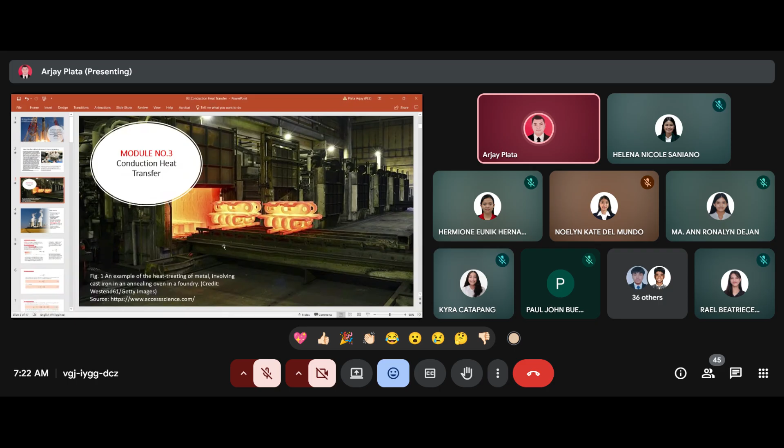So, our objectives for today are first, identify the important properties in heat transfer, develop a deeper understanding of Fourier's law, develop from basic principles the general equation termed the heat diffusion equation, which governs the temperature distribution in a medium, and solve problems related to conduction heat transfer. Okay. We will discuss the heat diffusion equation or heat equation, which governs the temperature distribution in a medium.

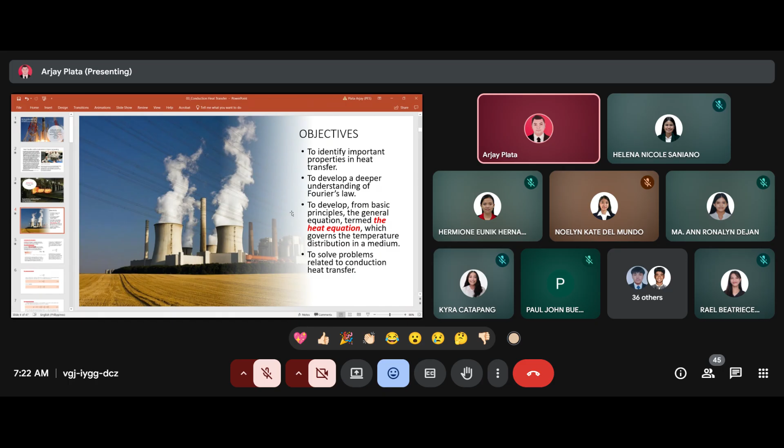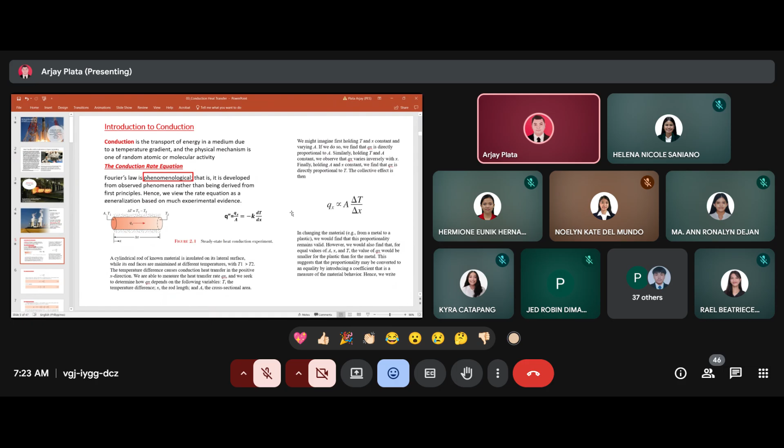Yes. So as we discussed, conduction is the transport of energy in a medium due to a temperature gradient, and the physical mechanism is one of random atomic or molecular activity. So if there's direct contact and there is a difference in temperature between the two surfaces, the heat will transfer. Fourier's law is phenomenological.

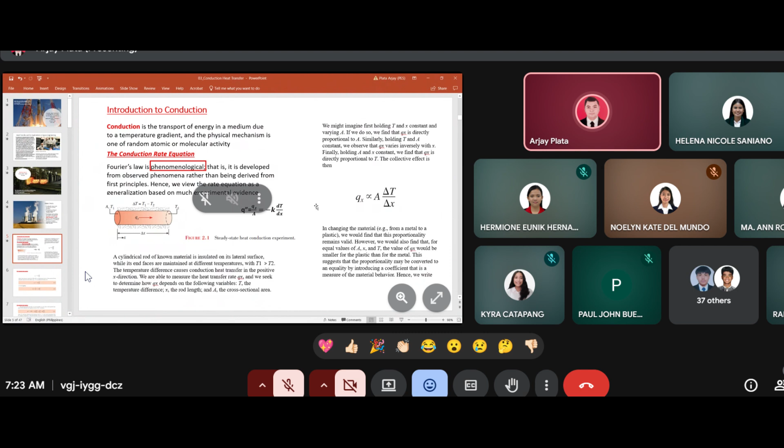When we say phenomenological, it is developed from observed phenomena rather than being derived from first principles. Hence, we view the rate equation as a generalization based on much experimental evidence. So during our first meeting, I mentioned that Fourier's law is experimental.

So Fourier investigated a cylindrical rod of known material, insulated on its lateral surface, while its ends are maintained at different temperatures: T1 on the left side and T2 on the right side. T1 is greater than T2, so obviously the heat will transfer. The temperature difference causes conduction heat transfer in the positive x direction. This is our x direction, the delta x.

So we are able to measure the heat transfer rate, Q, and we seek to determine how Q depends on the following variables: the temperature difference or delta T, the rod length, and the cross-sectional area. So Fourier checked how the change in temperature, the area, and the rod length vary.

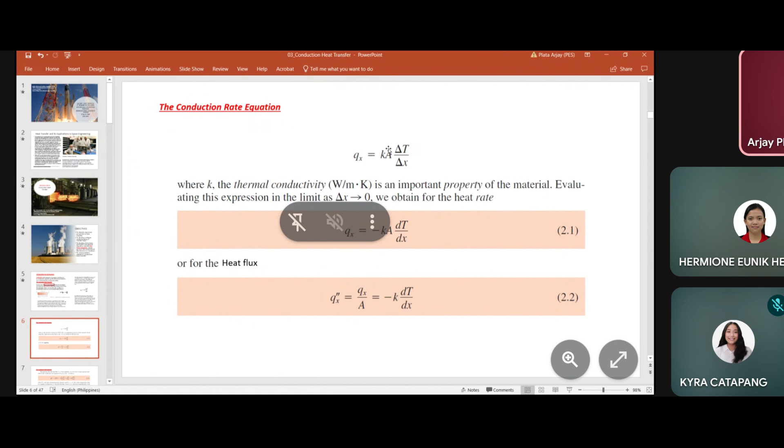However, we would also find out that for equal values of Ax and T, the value of Qx will be smaller for the plastic than for the metal. So this suggests that proportionality may be converted to equality by introducing a coefficient that is a measure of material behavior. So we write the thermal conductivity K, which is a property of the material.

Evaluating the expression as delta x, in the limit as delta x approaches 0, we obtain the heat rate equation Qx equals negative KA dt over dx. For heat flux, we just divide the heat rate by the area, giving Q equals negative K dt over dx. So that's the heat rate equation, Fourier's law equation.

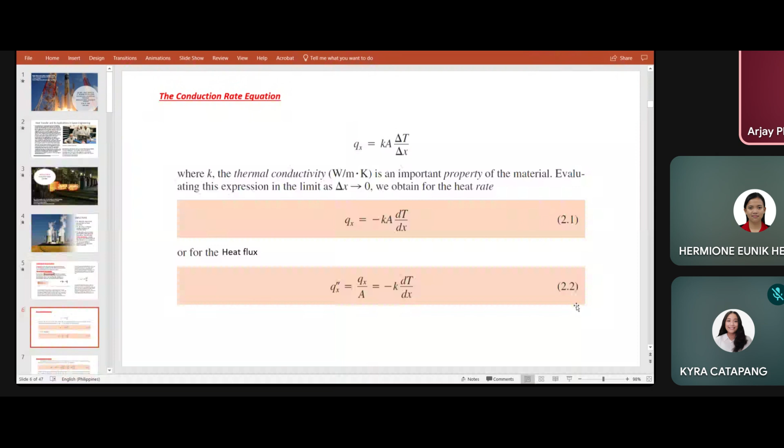In heat transfer, as I have mentioned, heat flux is a vector quantity. So we can write a more general statement of the conduction rate equation as follows. When we're three-dimensional, we have x, y, and z direction, so we end up with a partial differential equation.

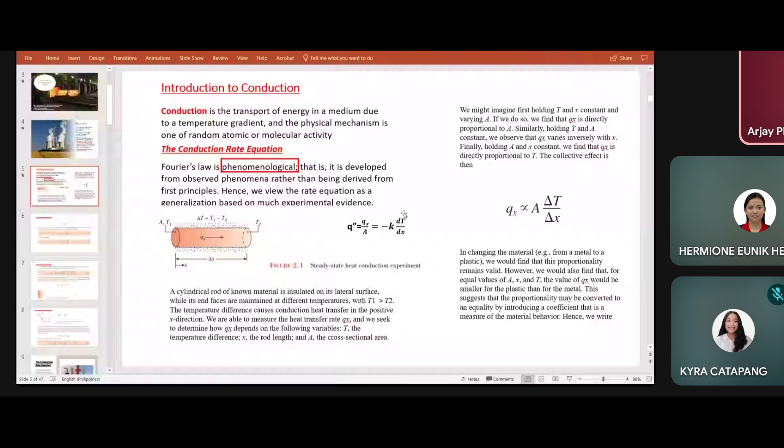An alternative form of Fourier's law is therefore: heat flux Q double prime n equals negative k times the partial derivative of t with respect to n, times n. This is Fourier's law in its alternative form.

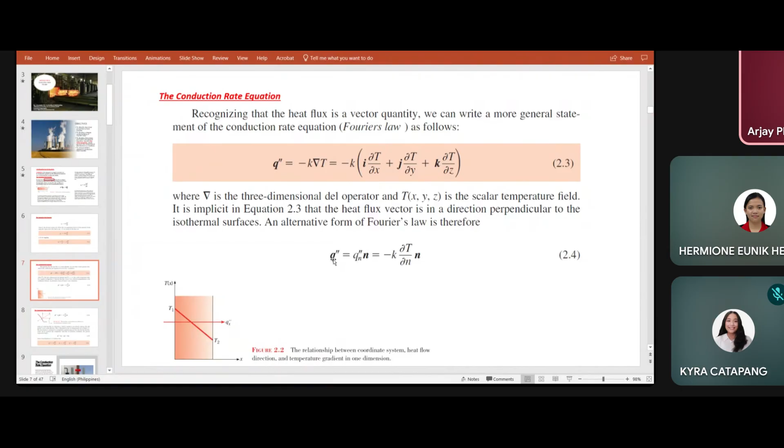This is what I mean by the x, y, z direction. So there's x, y, and z direction, or n. When heat flux, our Q here, Q double prime n is the heat flux in direction n, which is normal to the isotherm, and n is the unit normal vector in that direction.

We can resolve the heat flux vector into components such as in Cartesian coordinates. The general equation for heat flux equals i times heat flux in the x direction, plus j times heat flux in the y direction, plus k times heat flux in the z direction. Earlier, for one-dimensional, it was delta t over delta x. Now we use the partial derivative of t with respect to x. Only the denominator changes as we go from x to y to z direction.

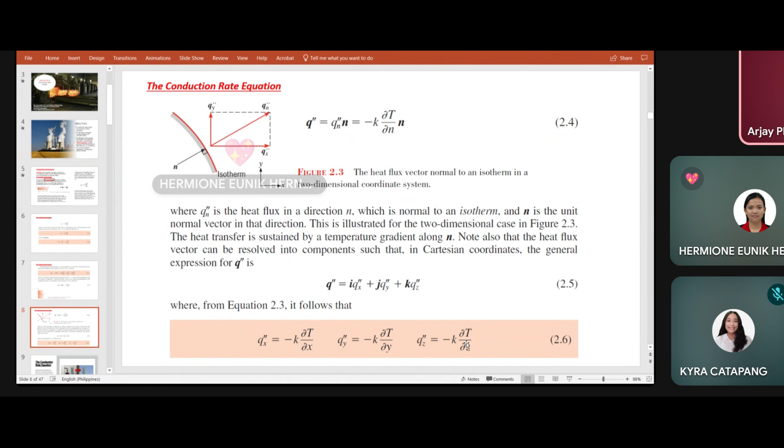Fourier's law is the cornerstone of conduction heat transfer, and its key features are summarized as follows: it is not an expression derived from first principles, but instead a generalization based on experimental evidence. It defines an important material property, the thermal conductivity. Fourier's law is a vector expression indicating that heat flux is normal to an isotherm and in the direction of decreasing temperature. Finally, note that Fourier's law applies to all matter regardless of state - solid, liquid, or gas - as long as there is direct contact.

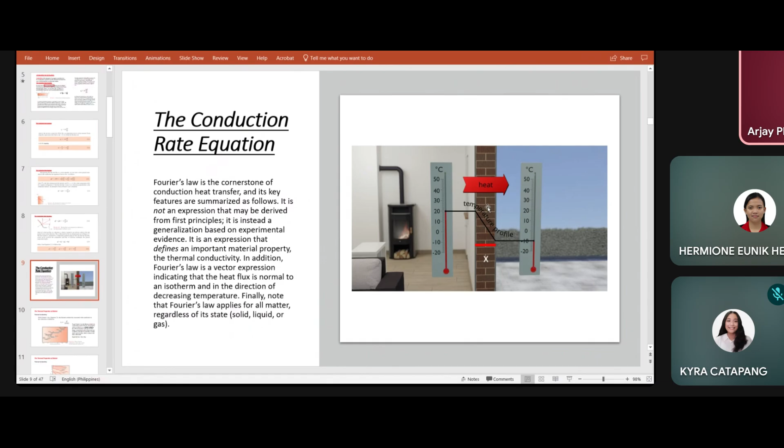This is the thermal conductivity property, one of the thermal properties of matter. Last week we defined the thermophysical properties, which are divided into transport and thermodynamic properties. Thermal conductivity is a transport property. To use Fourier's law, the thermal conductivity of a material must be known. This property provides an indication of the rate at which energy is transferred by diffusion. It depends on the physical structure of matter, atomic and molecular, which is related to the state of matter.

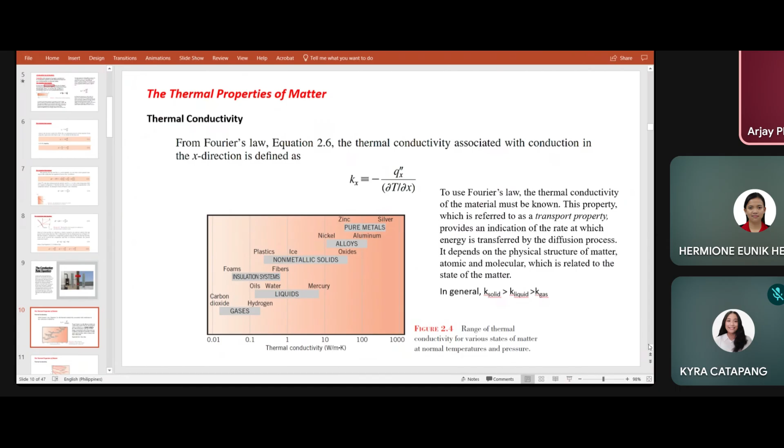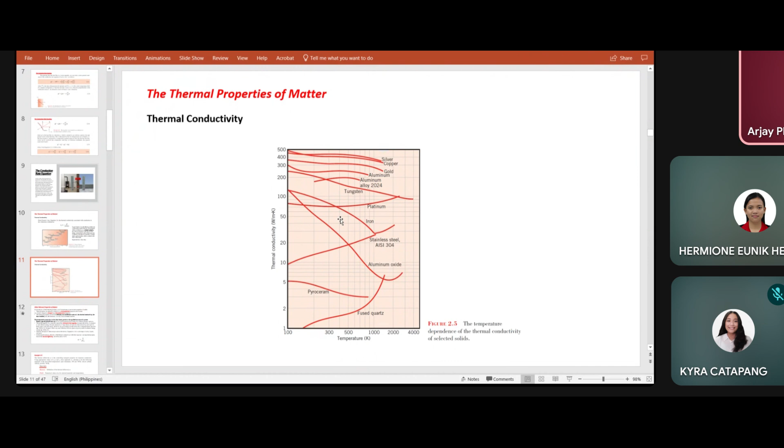Now, other relevant properties of matter. As I mentioned, we have thermophysical properties which are divided into transport and thermodynamic properties. Transport properties include thermal conductivity, diffusion rate coefficients such as thermal conductivity and kinematic viscosity - those are the transport properties. The thermodynamic property, on the other hand, pertains to the equilibrium state of a system. Included there are density and specific heat, thermal diffusivity as well, pressure, temperature, volume, specific volume - those are the thermodynamic properties, basically all the properties you study in thermodynamics.

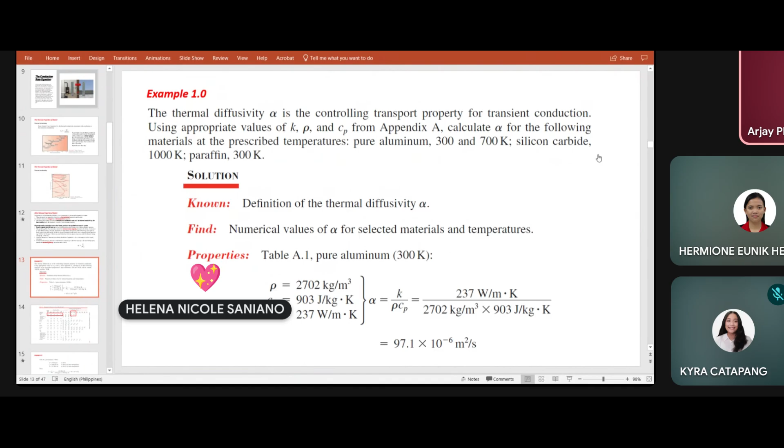Thermal diffusivity alpha is the controlling transport property for transient conduction. Using appropriate values of K, Rho, and Cp from Appendix A, which I sent you, calculate alpha for the following materials at prescribed temperatures: first is pure aluminum at 300 and 700 Kelvin, silicon carbide at 1000 Kelvin, and then paraffin at 300 Kelvin.

So we need to know the definition of thermal diffusivity. What is the definition of thermal diffusivity? In heat transfer analysis, it's the ratio of thermal conductivity K over heat capacity or specific heat and density, K over rho Cp - that's our thermal diffusivity. To get the value of thermal diffusivity, you just go to the table of properties, get the value of K, density, and specific heat, then take the ratio of those. Then you have the thermal diffusivity. Its unit is meter squared per second.

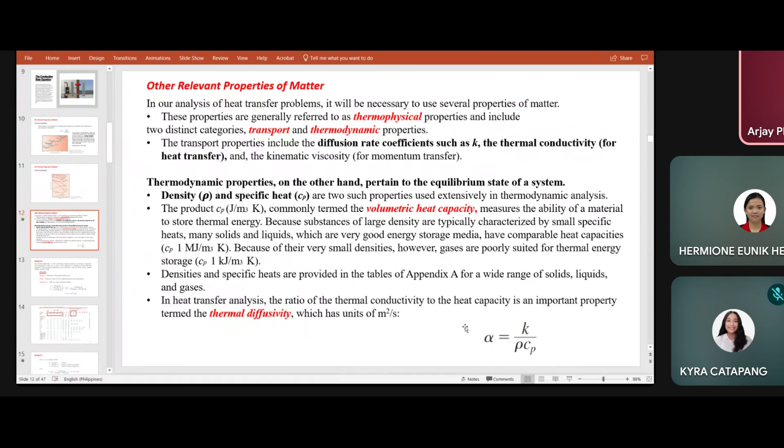Okay, so first is aluminum, pure aluminum. Let's go to the table for pure aluminum. Here it is, as you can see on our screen. Its density is 2702 kg per meter cubed, specific heat is 903, thermal conductivity is 237, and it already has a value for thermal diffusivity, but let's double check if 97.1 is correct.

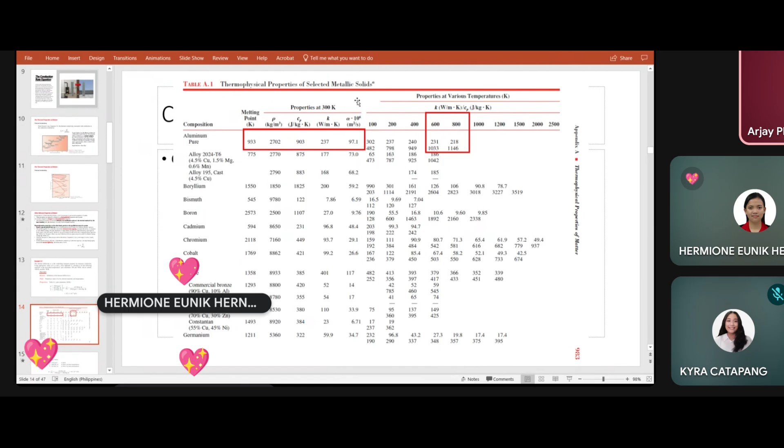Kapag 700 naman, mag-interpolate lang kayo. Try to interpolate. So at 700, same yung density. Ang meron changes ay yung specific heat. So by linear interpolation at 700 Kelvin, ang makukuha na value ay 1090. CP is 1090. So nandito siya.

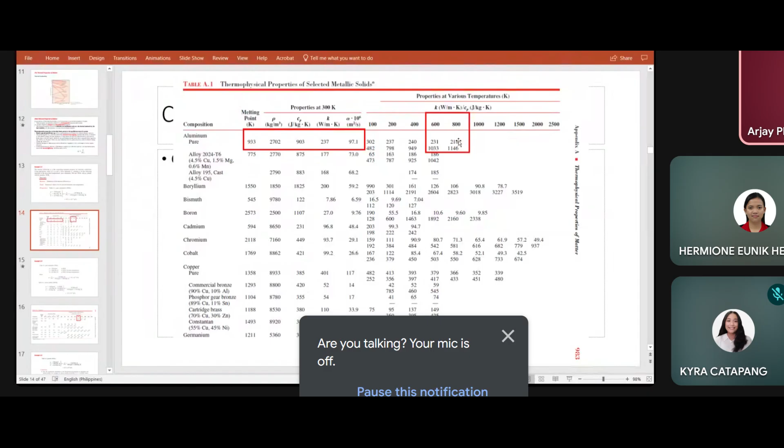Pagitan nitong 1033 at saka 1146. And then yung K nyo is 225 at 700. So 225 ay pagitan ng 231 tsaka ng 218. So yun, makukuha nyo na yung value ng thermal diffusivity, which is 76 times 10 to the negative 6 meters squared per second.

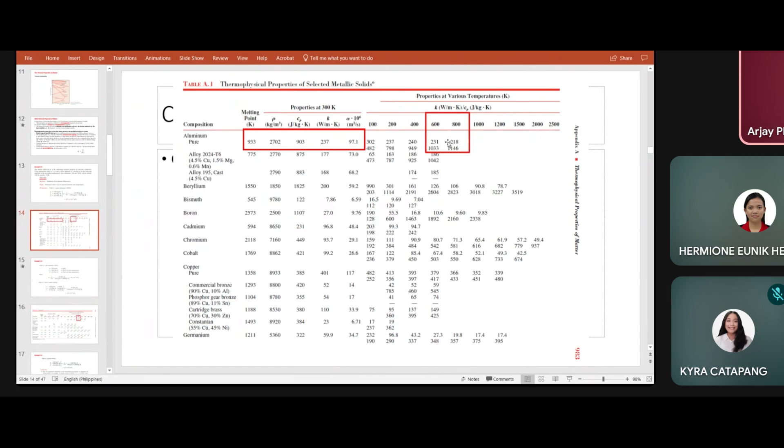Okay, may question? Yung specific heat, yun yung pangalawang row. Ito yung nasa una is thermal conductivity K. So yung pangalawa is yung specific heat. Doon yung kukunin yung value, yung 1090 kanina. So galing doon.

So let's proceed with another table, table A.2. Nandun naman yung silicon carbide. So yung hinahanap na next is silicon carbide at 1000 Kelvin. Punta tayo sa silicon carbide. Yan, ito yung silicon carbide, table A.2. So 1000 Kelvin, yun yung temperature dito. Ang hinahanap ay thermal conductivity tsaka specific heat. May density na tayo at 1,000.

Check natin, hindi naman nagbabago yung density. So 3,160 yung density na 300, ito pa rin yung density, hindi nagbabago yung density. Tapos ang specific heat at 1,000 ay 1,195. So yung value ay galing dito, sa 1,195, yan yung specific heat niya. Tapos yung kanyang K ay 87. So may makukuha kayong value na 23 times 10 to the negative 6 meters squared per second.

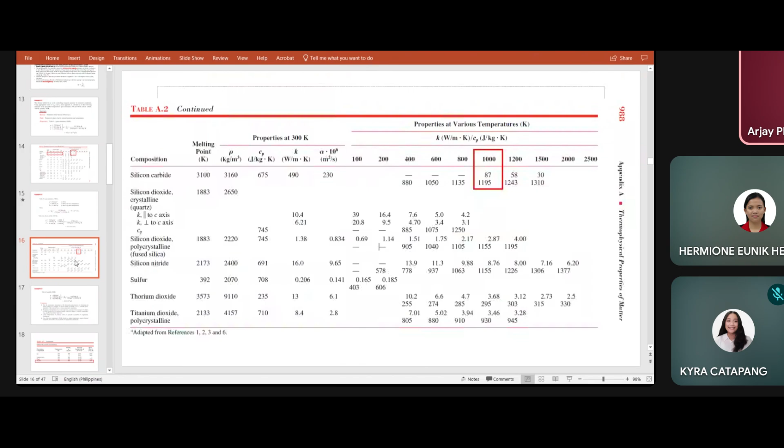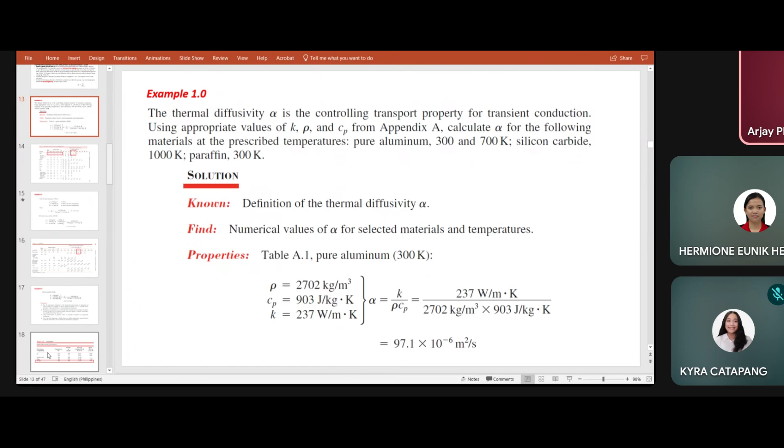Okay, so yan. And then ang next na hinahanap ay paraffin at 300 Kelvin. So punta tayo sa table ng paraffin. Pwede nyo naman siya i-control F lang, para malaman nyo kung nasaan. Yun, so yung paraffin is nasa table A.3. So 300 Kelvin, ang value ng density ay 900. So we have 0.24 thermal conductivity and 2890 specific heat.

Okay, so kunin lang natin, substitute natin yung mga values. So 900, 2890, tsaka 0.24. So the thermal diffusivity equals K over rho Cp. So we have 0.24 watt per meter Kelvin over density of 900 kilogram per meter cube times 2890 joule per kilogram Kelvin. So we have 9.2 times 10 to the negative 8 meters squared per second. So yan yung ating thermal diffusivity value, alpha.

Okay, so note that the temperature dependence of the thermophysical properties of aluminum and silicon carbide. For example, for silicon carbide, thermal diffusivity at 1000 Kelvin - if mapapansin nyo, may mga thermal dependence yung aluminum at saka carbide, so naka-thermally dependent sila. They have strong temperature dependence. So nagbabago yung value ng thermophysical property nila kapag tumataas yung temperature. And also, kung mapapansin nyo din, mas mataas yung value ng thermal diffusivity ng metal compared to other materials, kasi mas mataas yung kanyang thermal conductivity.

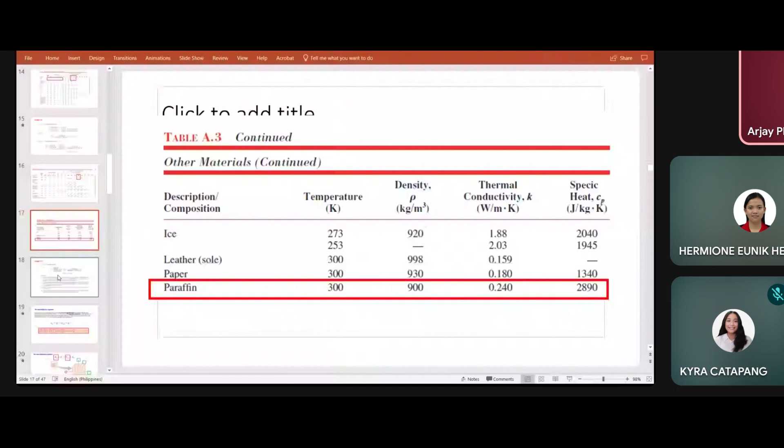Depende kung meron kayong gustong i-note, o halimbawa meron kayong kailangang i-conclude, dun siya i-mention sa comments. For example, meron ang pinapahanap sa problem is halimbawa, transient or steady state ba yung ating heat transfer rate. So sa comments, pwede nyo doon ilagay na therefore, the rate of heat transfer is a steady state heat transfer. So mga ganun, kapag meron kayong kailangang i-prove sa problem, doon nyo ilalagay sa comments. Case-to-case basis. Minsan naman, kapag exact answer lang yung hinahanap, let's say may exact value lang na kailangan sa problem, pwedeng wala nang comments. So pag meron lang kailangang i-prove, doon nyo siya i-mention.

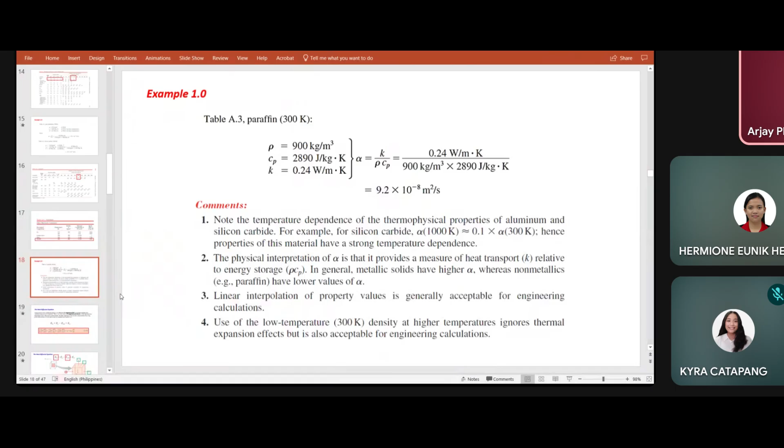So we will now proceed with heat diffusion equation.

Okay, so a major objective in the conduction analysis is to determine the temperature field in a medium resulting from conditions imposed on its boundaries. So that is, we wish to know the temperature distribution, which represents how temperature varies with position in the medium. So once this distribution is known, the conduction heat flux at any point in the medium or on its surface may be computed from Fourier's law.

So sa heat diffusion equation, parang i-apply natin dito yung first law of thermodynamics. So energy can neither be created nor destroyed. So yung energy na coming into the surface plus yung energy na na-generate, minus yung energy na going out of the surface is equivalent to the stored energy. So ito yung first law of thermodynamics natin. If you can recall, yung energy balance, if we are doing the energy balance in thermodynamics, so ito yun.

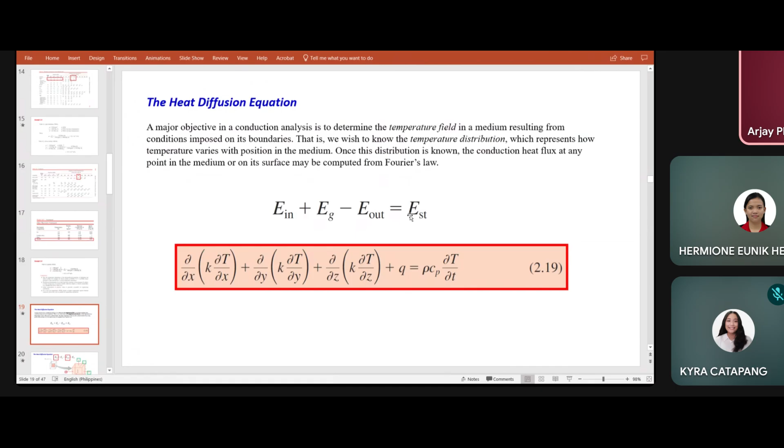Again, don't forget this energy balance equation. Energy in plus energy generated minus energy out is equivalent to energy stored. Yung energy generated, possible na may internal energy na generate as heat is being transferred into the system, due to molecular activity. So, yung energy na pumasok minus energy na lumabas plus yung energy na generate ay equal dun sa energy na nai-store doon sa ating system. So, since masyadong malaki yung system natin, kukuha lang tayo ng maliit na portion, yun lang i-consider natin.

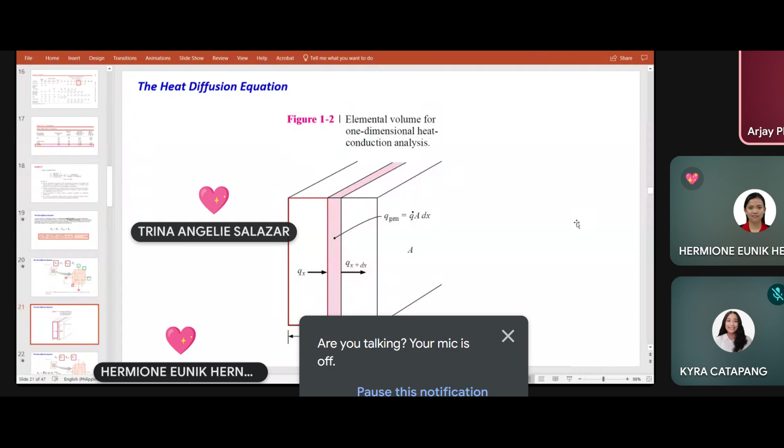Yan, for example. So, q of x. Ito yung elemental volume for one-dimensional conduction analysis. So, ito yung q of x nyo. Dadaan siya dito sa dx. Ito yung x, nagkaroon ng change, dx. So, i-add lang natin yung x plus dx. Paglabas nito, is q of x plus dx, q sub x plus dx. Okay?

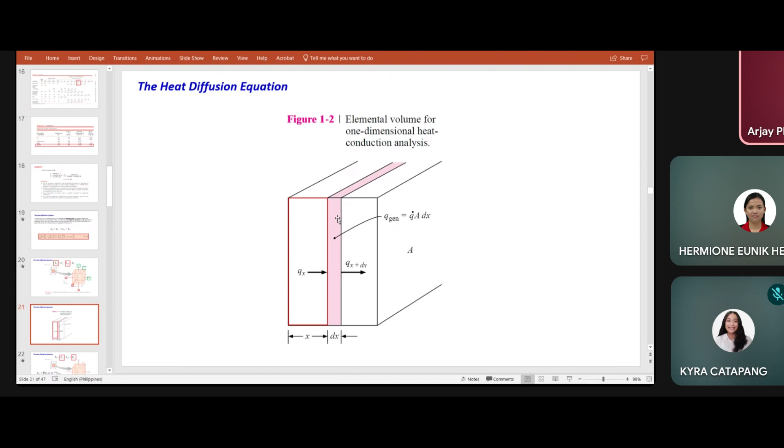Yan. So, ganun lang. Sa y direction, ganun din. Okay, so y direction. Ano yung y? Ito yung y, sa tapat ng y-axis. So, yung y, pagpasok niya dito, meron tayong dy. So, magkakaroon ng change in y direction. So, yung heat transfer natin is magiging q of y plus dy, q sub y plus dy. Okay?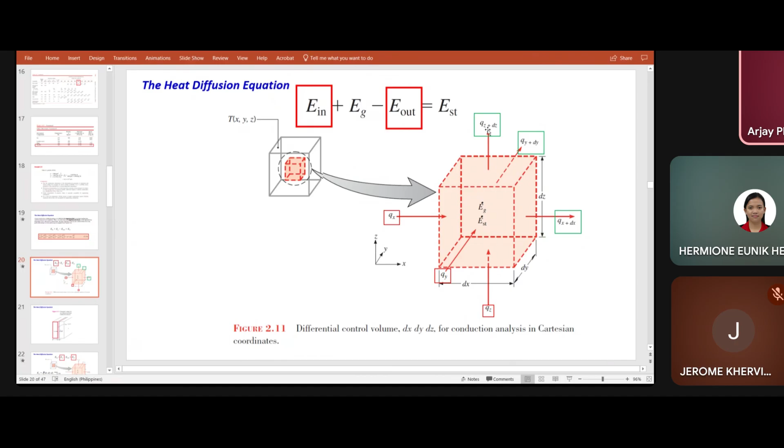Okay, so we have qx plus dx, qy plus dy, qz plus dz. So that's the energy coming out. Okay? And then we have energy generated and energy stored.

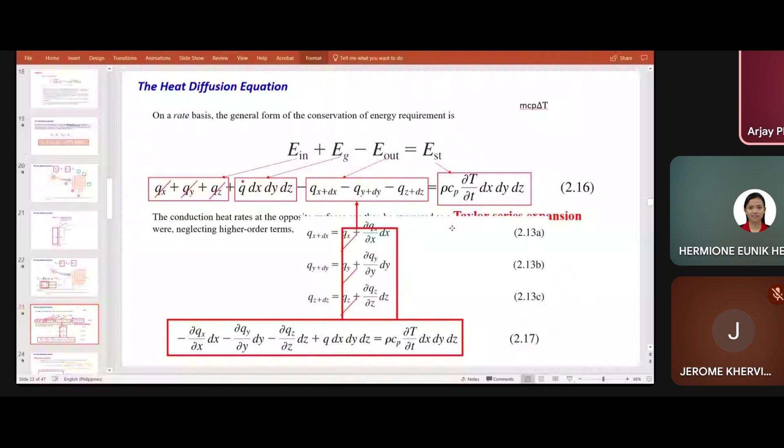So meron na tayong equation 2.16. So yung conduction heat rates natin at opposite surfaces can be expressed na in terms of Taylor series expansion. So we're neglecting higher order terms. Okay, so ang Taylor series expansion kasi, yan, halimbawa ito. So, kasalanan to ni Taylor Swift.